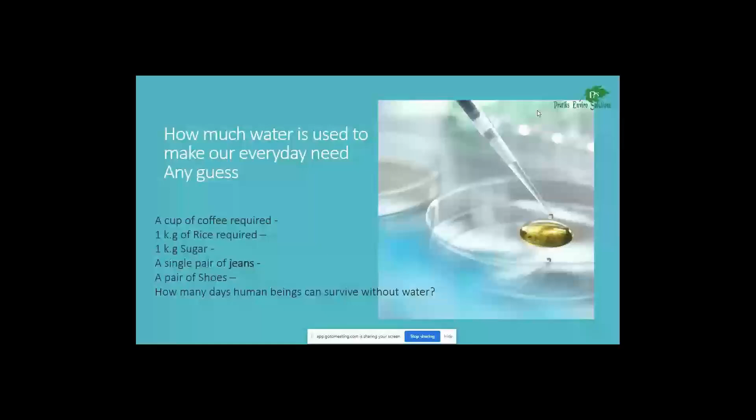A pair of shoes, how much water does it require? You are nowhere near. 50, 20, right. And finally, how many days can human beings survive without water? Let's see the answers. A cup of coffee requires 140 liters of water to produce the ingredients to make a coffee.

And a kg of rice requires 2,500 to 3,400 liters. Imagine the amount of water we are using to produce rice. And sugar requires 1,500 to 2,000 liters. And one single pair of jeans, 10,000 liters. And the shoes about 8,000 liters. And human beings can survive a maximum of 7 days without water. Without food, roughly about 25 days.

This is the kind of water we are consuming in day-to-day life. But it is all hidden water which we can't even see day to day, and we don't even think about it. When we have a cup of coffee, we never knew that 140 liters is required to produce just 1 tablespoon of coffee powder. So that is the kind of water we are spending. In that case, if there is no water, we can't have our coffee, rice, sugar, whatever, in day-to-day life. That is the kind of role water plays.

Water is definitely a lifeline. It is a natural resource, and it forms the basis of all life. It makes up 70% of our human body and is present in the bodies of all plants and animals. And types of water in apartments: normally it is called domestic purpose. We will have 2 types of water. One is fresh water, generally sourced from groundwater, a borewell or well, the municipal supply, or surface water. And the other water produced by the apartment is wastewater. The source is domestic usage, sewage wastewater from the apartments.

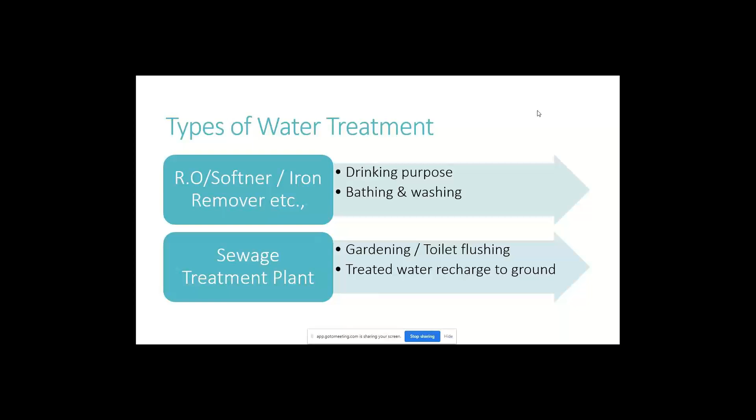Generally in these sewage treatment plants, the treatment is done and the water is used for gardening or toilet flushing. A couple of apartments may be using treated water to recharge the ground, and there are certain regulations on that. Maybe at the end of the session we can discuss in detail recharging groundwater with treated sewage. RO, iron remover or softener are common technologies that everybody knows about. We are also capable of taking up these kinds of water treatment projects on a large scale, and we can even take up operation and maintenance if required.

When we talk about sewage water problems and effective green solutions, today the main agenda is to know the challenges or bottlenecks in managing sewage. We strongly believe in managing your wastewater yourself in an effective and very simple way. That is where we make the technologies more sustainable. Our bio sewage treatment solution won the national award this year, 2020, and we received the award in Delhi from the minister.

Water is everywhere, because we are all talking about water. In fact, only 1% of the water is available for our consumption, which comprises rivers, lakes, and groundwater. 2% is polar ice, and 97% of the water is ocean. As you are all aware, treating ocean water is not a joke, because the TDS level will be about 25,000 to 30,000 ppm. Obviously, treating saline water is a very tough task, and also a very costly affair, both management and initial investment. That is why whatever 1% is left over for us has to be taken care of.

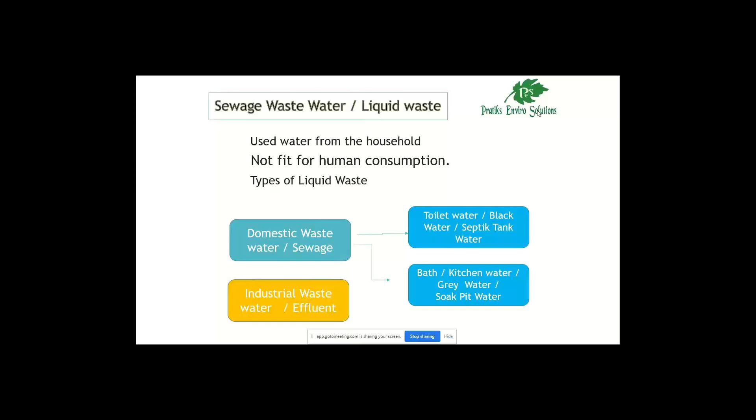And the waste management challenges we are facing in our country as a whole, not just an apartment alone: lack of sewer systems in urban and rural areas is the main challenge. To tackle this, the government has taken an initiative to put the responsibility on the shoulders of the citizens or the larger apartments, where they can have their own treatment facilities and a sewer system is not required for them at all. For new apartments or new upcoming layouts or areas, it is much easier.

But when it comes to existing systems, upgrading is a challenge, because one is the investment, that's the capital, and another is the operation front. That is where we help people restore these applications. And a huge investment is required for an underground drainage system. I'm talking about the country as a whole.

India's population is growing at a very fast pace, and at that pace we can't build an underground drainage system for everybody who wants it today. By the time we develop the project and execute it, it will take another 3 to 5 years, and then the population will have grown another 20% or 30% more. So we are unable to catch up with that pace; it is outgrown by population. That is the main reason we are unable to cover the entire drainage system in our country.

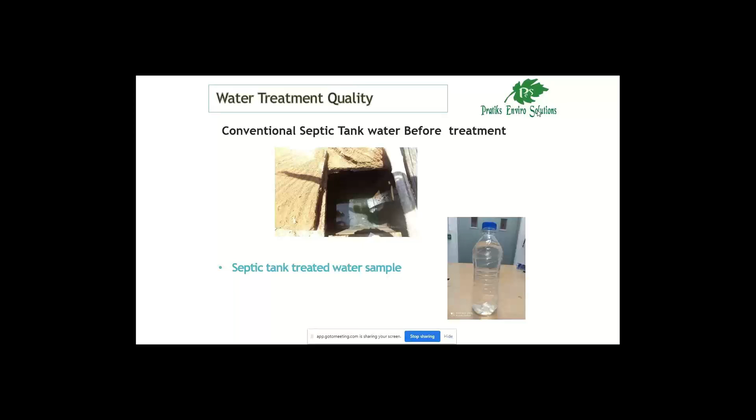And this is the ready-made system which we developed. The reason is, when we talk about any technology, everybody talks about the timeline. They ask within how many days it can be done. That is where lots of people go back, because of busy schedules. Most of the time they are busy with their own work, and they don't have much time to invest in this kind of activity.

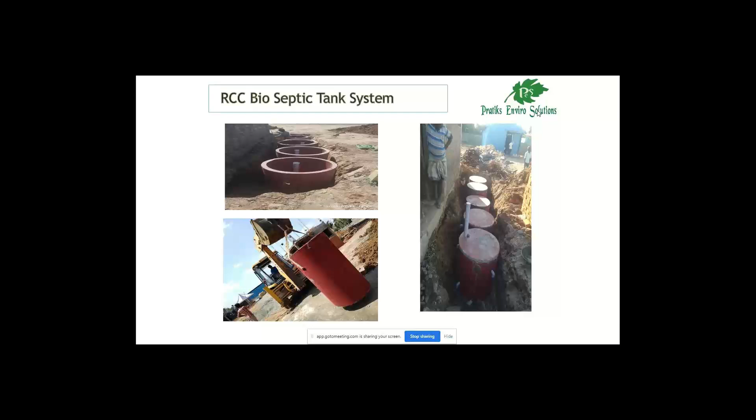That is where we developed an application which is just a fit-and-forget kind of model within a day. Maximum, we start in the morning by 6:30, and by evening 7 o'clock we hand over the project to the clients. And this can be done for an existing septic tank system to upgrade into a bioseptic tank. And also we can install new bioseptic tank systems where new projects are coming up, new buildings or apartments or whatever. I'm talking only about smaller scale apartments.

And the next level, when we are talking about a sewage treatment plant, where we are talking about a minimum of about 10,000, 20,000, 50,000, 1 lakh liter, 2 lakh liter, kind of 100, 200, 300 KLD plants, where you have apartments of more than 50 and up to 1,000, 1,500 apartments. In that case, we cannot handle it with that kind of smaller application.

That is where we have developed this bio sewage treatment plant, which is an anaerobic wastewater treatment system using a biological process. The microorganisms degrade the organic contaminants in the absence of oxygen and treat the water, and this process is an energy efficient system. It treats the water by gravity. That is the biggest advantage, saving the cost on electricity.

And when we talk about aerobic wastewater treatment, the microorganisms convert organics into carbon dioxide and new biomass in the presence of oxygen. Aerobic microorganisms require oxygen, so air must be continuously circulated through the tanks. You must be knowing about the aeration tanks. That is what I'm referring to here. Forced air from an air blower or compressor is mixed with the wastewater, where the aerobic bacteria feed on the waste in the water and treat the water biologically.

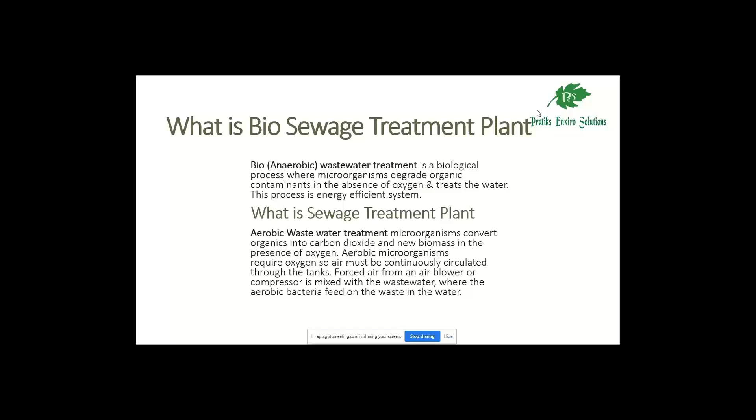And this is the difference between the conventional sewage treatment plants and the bio sewage treatment plant. When we talk about bio STP on the left-hand side, it is an anaerobic STP, 100% biological. We don't use any chemicals at all. The conventional STP is aerobic based, and we also use chemicals, urea and DAP, to stimulate the microorganisms in the water. That is dosed in the aeration tank so that the microorganisms increase.

And electricity is required in the conventional system. In bio STP, 95% of the system does not require electricity and treats the water by gravity itself. The conventional STP requires operators, 3 shifts per day. In our system, we don't require operators at all. And the treated water quality 100% meets the pollution control board norms. Even the latest norms the government has given, we exceed that limit as well.

And the biggest advantage of the bio sewage treatment plant is that 90% of the treated water you can recharge into the soil. I have seen a lot of apartments that depend on lorry tankers even for treated water, because they don't know how to recharge it, or there is a government regulation that you are not supposed to recharge the water into the ground. We will talk in detail at the end of the session on that.

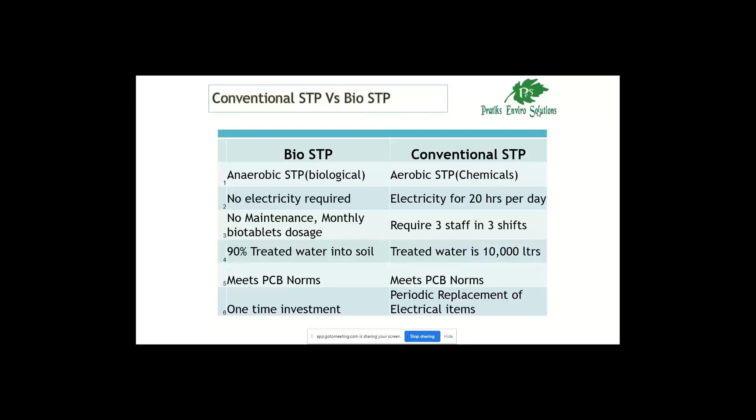So bio STP is just a one-time investment, and with conventional STP there will be periodic maintenance when it comes to electrical items, because normally all the pumps or aerators have 1 year warranty only. After a year, you need to replace or repair and revamp them as and when required. And since these pumps run almost 20 to 24 hours, after a year they will not have that kind of life unless you use a very big brand.

And this is the BioSTP installation. On the left hand side, the first picture is actually Shantiniketan College, which we have done in Bengaluru. I forgot the name of the area. In that area, we have installed a 100 KL plant. There are about 4,000 students, and they use this treated water for toilet flushing. This was installed nearly 2 years back and is functioning very well.

And you can see the construction. We gave a design and they did the construction of these tanks. Below the ground, we installed the entire system. And above that, you can see the roof, and they put up toilets there. From there, everything gets into the first tank, gets treated, and from the final tank the treated water goes back to the toilets again. You can see the entire recycling happening in the same space itself.

In case you really want to visit the site, we can take permission from them, and then we can definitely give you an opportunity to go and visit the site as well.

And you can see the second picture, which is 10 KL, 20 KL, smaller STPs, which we do in a day's time, because we are the manufacturers of RCC precast tanks and the entire digester system. This kind of system can be done for 5 KL, 10 KL, 15 KL projects within a day. In the morning we can start by 6:30, and by 7 o'clock we'll complete the work and connect the pipes also. They can start using it from day one. That is the kind of system we are talking about.

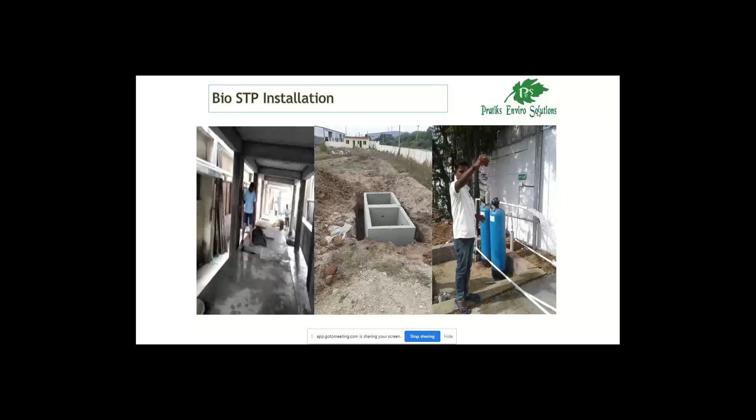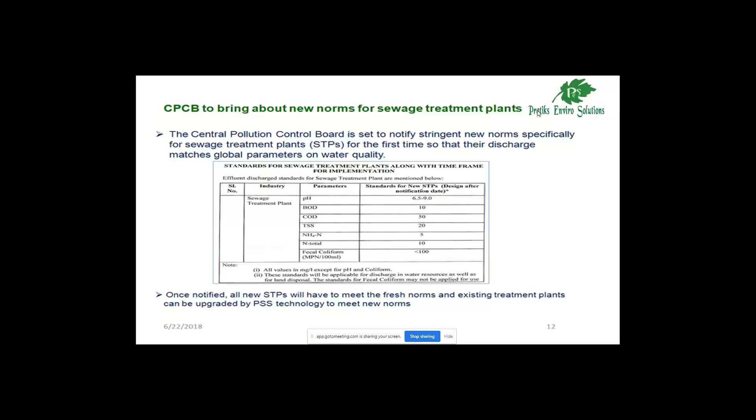And you can see on the right hand side, the treated water sample has been taken in the bottle, right? So these are the Central Pollution Control Board's new norms for sewage treatment plants: pH 6.5 to 9, BOD 10, COD below 50, TSS 20, ammonical nitrogen 5, nitrogen 10, and fecal coliform below 100. All these have been achieved in Shantiniketan. This is the test report.

When did we do this test report? It is 16/4/2019, last year, April. Even today, they are using it. Only because of COVID-19, the schools have been locked for the last 4-5 months. Until then, they were using this water. Even now, as and when they go to school, only a few staff are working, and they always send the details to us.

And you can see this test report here. Mainly, we are talking about BOD, biological oxygen demand. The guideline was 10, and last year itself we achieved this target: 8.4, which we achieved in our BioSTP. And COD is 50, and we achieved 48. And nitrogen below 10 is the guideline, and 8.9 we achieved.

Ammonical nitrogen 2.3. If this is the standard, if you achieve 100%, your water is suitable for recharging into the soil. No one can ask the question. 100% it is rechargeable. The only threat we have when we are giving this system to apartments, or even industries or any residential buildings, is that the moment people come out of the problem, and once they are comfortable, they forget to maintain the plant. That is where the threat is.

In case you don't maintain it, the raw sewage starts getting into the groundwater. That is why the governments are more keen and very clearly saying no point in recharging into the ground. The only reason, everybody knows. You'll never be able to see anything. That is where we are more concerned on the maintenance part.

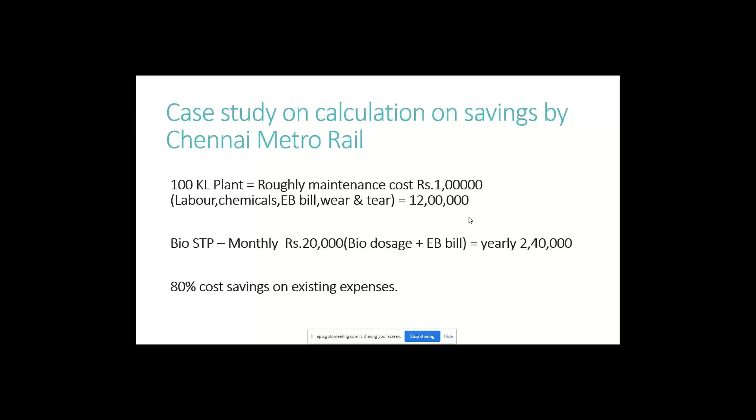So per year, including everything, is about 2,40,000 rupees. You see where is 12 lakh rupees expenses on your current STP and where is BioSTP of 2,40,000. So 80% cost savings on the existing STPs itself we can do if we upgrade the existing STP into BioSTP.

Madam, I'm sorry to interrupt here, but aren't ozonators very expensive to buy? Definitely no, sir. When we talk about an ozonator, we are not using the ozonator for the treatment process. We are using it in the final tertiary tank. In the tertiary, we are using an ozonator. Okay.

I beg to differ, madam. I believe that ozonators are expensive. We'll just run through this. At the end of the session, definitely we are going to discuss in detail on that, sir. I think that is better. Sure, madam. I'm sorry to have interrupted you. Definitely we will discuss, sir. We are here to discuss in detail about this.

Play this BioSTP video. Sandhya, can you please switch over the system to play the video? Just 1 second. Is it audible? Not audible. I've given the full volume. Still not audible. You can send the link instead. We'll try finally once; if not, we can send the link. Post the link in the chat window. No, that's okay. People can check it out later.

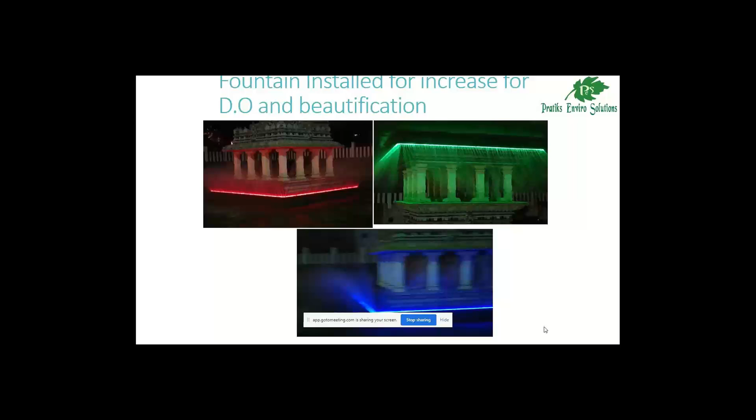We increase the dissolved oxygen by mixing the water. We design it in such a manner that the entire lake water gets mixed in 2 or 3 hours a day. We mainly advise them to do it in the evening hours, 6 to 7 o'clock, so that whatever DO is increased in the evening can be maintained during the night, and early in the morning, the moment the sun is up, your DO automatically keeps increasing.

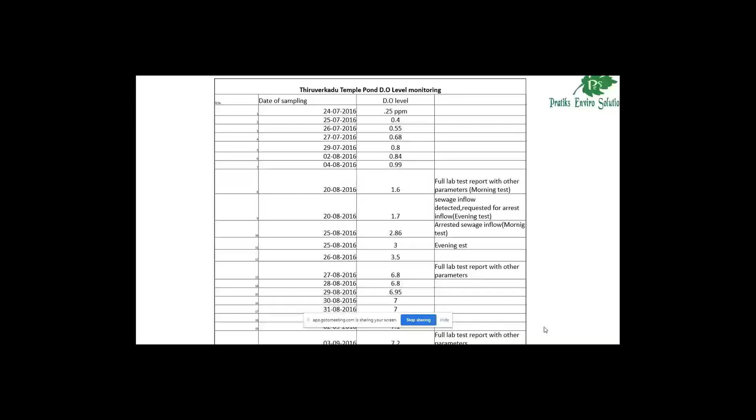So this is the day-to-day DO level testing, and the dosage we did. You can see when we started in Thiruverkadu, it was 0.25 ppm. Imagine, 7 to 8 ppm versus 0.25. That was the worst scenario when we visited the site. After that we slowly increased it, brought it up to 7, and it is maintained because of the fountains, since the fountain is ultimately a self-sustainable system. We can't be doing the biodosage or bioremediation daily, because it is definitely not cost effective over the longer run, on a daily or monthly basis.

Madam, sorry for the interruption. I think you can lessen the treatment in the ponds attached to the temples. You are more interested in the bio STP, and let us have some discussions more on that. You can continue, but we can make. Thank you. I will make it shorter, sir.

Thank you, sir. And this is another one in Kapaleeshwarar temple, a similar kind of scenario there. These videos, maybe we will post them later because there are some video issues. And the water hyacinth: normally in water bodies you will have this water hyacinth outgrowth and lots of pollution there. And this is another case study in Madipakkam Lake. It's about 50 to 60 acres in Chennai.

And the same issue of fish death was there, and it was covered in almost all the newspapers. We came to know through the collector, and then we visited the site. This was the assessment we did, the DO. And the inlet water was a sewage inlet. The advantage in this project is we never diverted any sewage line to any other pipelines. We treated the sewage inlet within a day itself by implementing our biopit technology. Then the second day, we let out the partially treated water into the lake.

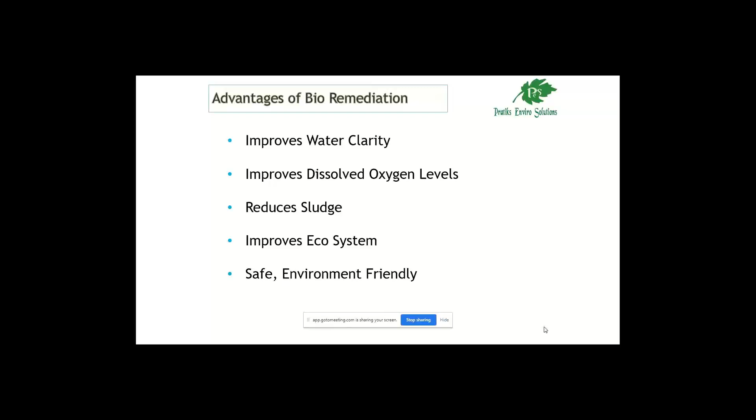In summary, sewage water is very simple to manage, recycle, and save water and cost. Where we can support you: one is consultancy services for entire water management at an economical cost and to meet the pollution control board norms with the current system. If you have a current STP which is not meeting the parameters, definitely we can help you meet the parameters by giving the consultancy service, and if you want we can execute the work as well.

And upgrade existing septic tanks into bioseptic tanks wherever you have conventional septic tanks, and install new bioseptic tank systems for new apartments and new buildings. And grey water recycling, if somebody specifically wants only grey water, we can. And install new bio STPs or upgrade existing STPs into bio STPs. And water treatment plants like RO, softener, iron remover, etc. Any issues you are facing, we can take up consultancy services, or if you want us to execute the project, we can very well give you the proposal for that as well.